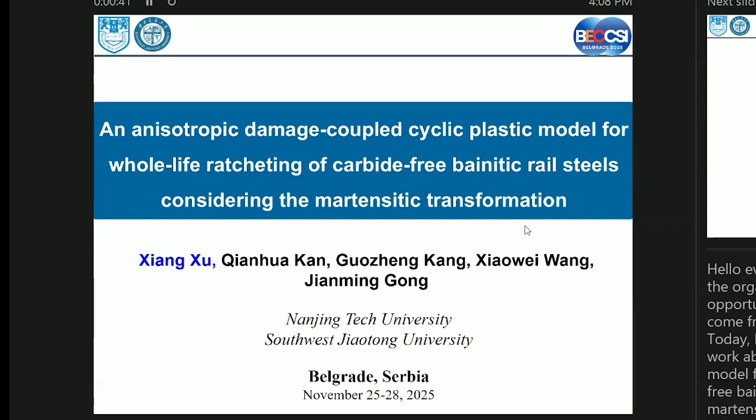Let's move on. First, I will introduce the research background and then the experimental observations. After that, more attention will be concentrated on the damage coupled model, followed by simulation results and some discussions. At the end, some conclusions will be presented.

Let's get started. First, the background of this research is on heavy haul railway transport. Heavy haul railway transport has been globally acknowledged as a leading direction for the development of freight rail systems, owing to its high capacity, efficiency, and low cost. The design axle loads of heavy haul railways continue to rise, so the rail materials need to offer significant improvement in wear and fatigue resistance.

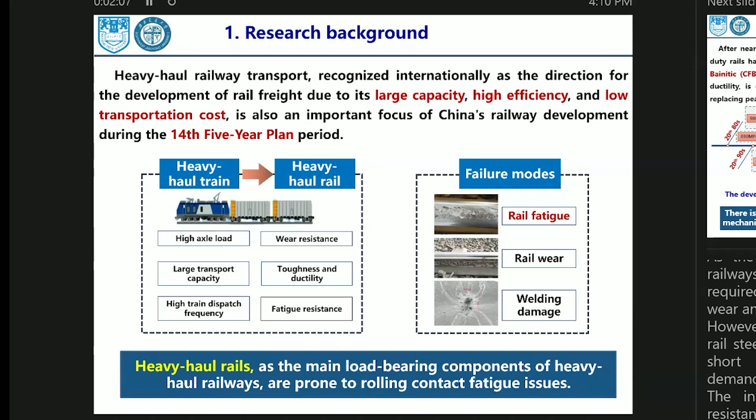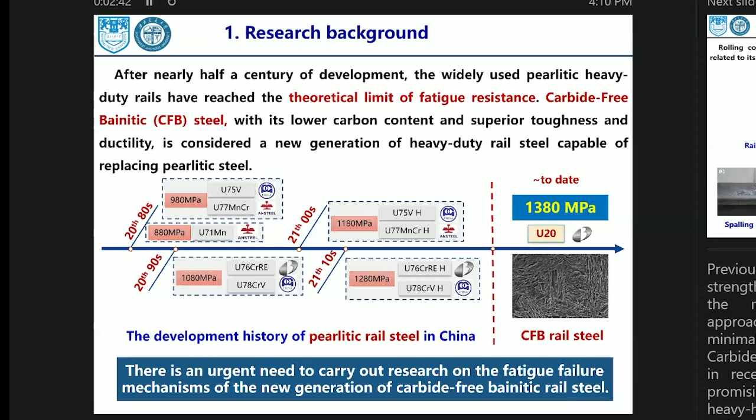However, the mechanical properties of rail steels currently in service in China fall short of meeting increasing operational demands. We need another choice since currently used pearlitic heavy haul rails have reached the theoretical limitation of fatigue resistance. Carbide-free bainitic steel, due to its low carbon content and superior toughness and ductility, is considered a new generation of heavy haul rail steel.

Actually, this material has been used in some heavy haul rail lines in China, like the Shitai line, Binsui line, and Shenshan line.

We find the main failure mode is rolling contact fatigue, and we find cracks on the gauge corners. As the cyclic loading increases, spalling will be found.

In addition, we also find the volume content of retained austenite on the surface is lower than other areas, and as the depth of the position increases, the volume of retained austenite increases. So the rolling contact fatigue is related to the microstructure, like the martensite or the retained austenite.

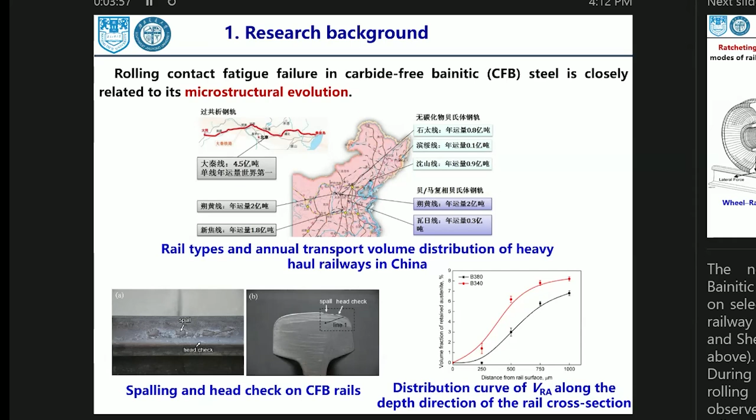In the practical wheel and rail rolling contact, the rail experiences cyclic loading with the surface subject to combined rolling and sliding under relatively high contact stress. Extensive studies have identified cyclic strength and plastic deformation as the primary contributors to rail degradation. When contact-induced stress exceeds the plastic shakedown limit of the rail surface, each cyclic loading introduces incremental plastic deformation, which accumulates over time. This phenomenon is known as ratcheting.

This finding highlights the critical role of plastic ratcheting in rail rolling contact fatigue. To mitigate the risk of catastrophic rail failures under such demanding conditions, it's important to investigate the ratcheting behavior of rail steels.

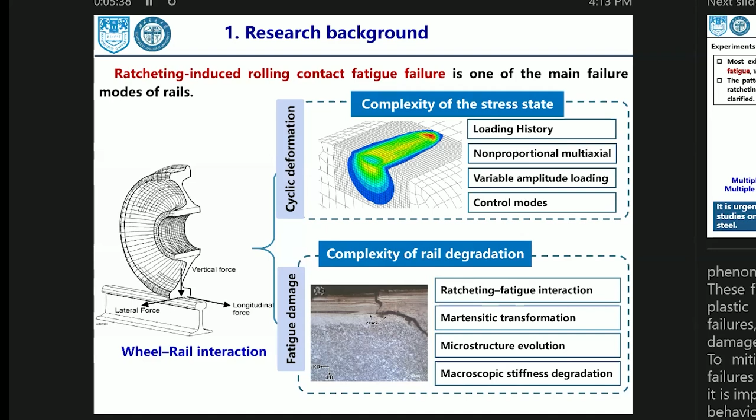For the new material, ratcheting research is lacking, and it's urgent to conduct related research. Most existing failure studies focus on monotonic tension and strain-controlled fatigue of this material, with a lack of experimental research on ratcheting deformation. The patterns of plastic deformation and martensitic phase transformation during ratcheting deformation, and their effects on fatigue damage, still need to be clarified. So it's urgently needed to conduct macro and micro scale experiments to study the mechanism of ratcheting fatigue interaction in CFB rail steels.

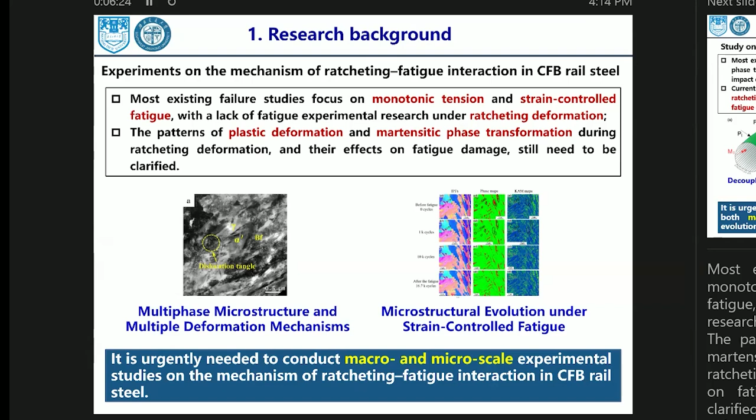For the model research, most existing constitutive models focus on describing the effect of martensitic phase transformation on strength and toughness, while models considering its impact on fatigue damage evolution are lacking. Current research mainly addresses the influence of damage evolution on ratcheting deformation, with limited attention to the effect of ratcheting on fatigue damage evolution. So we need to develop a new model that considers both martensitic phase transformation and fatigue damage evolution.

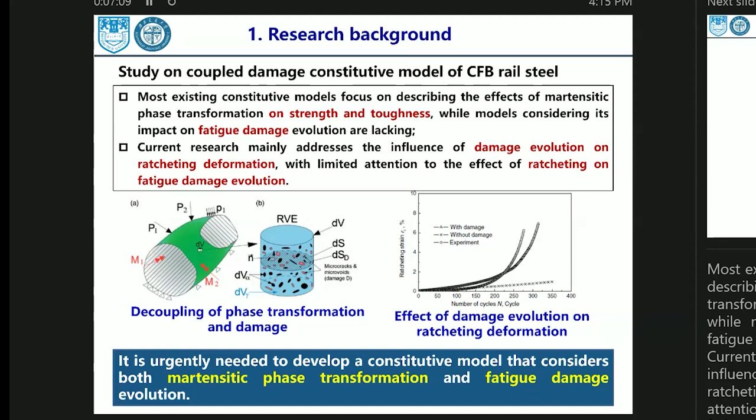Let's see some observations from the experiments.

And for the macro experiment, we used the MTS machines to do some tensile and compression, and also some multi-axial loading paths.

To investigate the evolution of the microstructure phase during the process, we conducted XRD experiments at a different number of cycles of the interrupted experiments, which can further obtain the volume fraction of the retained austenite and the dislocation density.

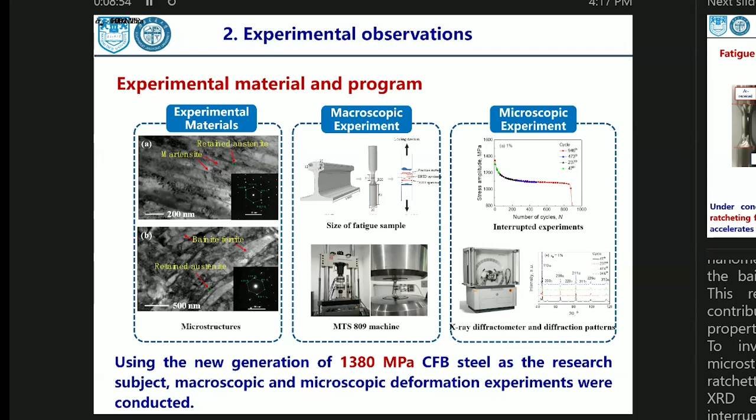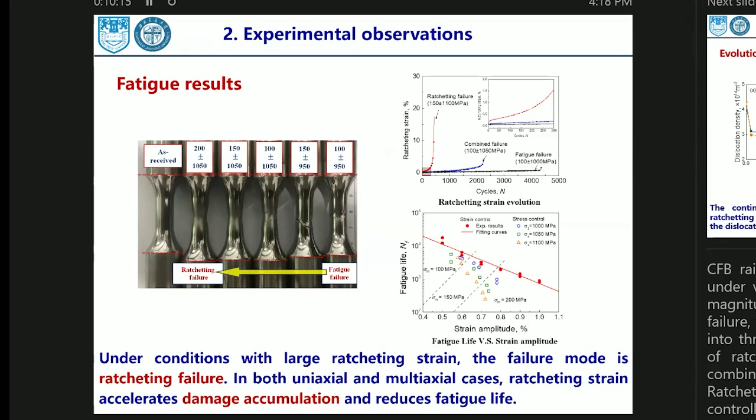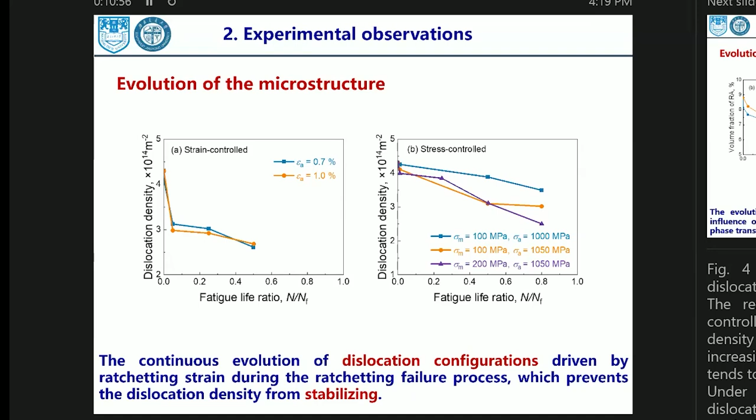And we also find microstructure evolution during the cyclic loading - this one is strain controlled and this one is stress controlled. We find the dislocation densities under the strain controlled mode decreases rapidly in the initial cycles process and reach constant values,

but under the stress controlled, the dislocation density reduces slowly and does not reach a plateau. And for the volume fraction of the retained austenite, we also find similar trends under strain controlled - the volume fraction decreases rapidly and reaches a constant value, and under stress controlled, the volume fraction of the retained austenite decreases continuously and does not reach a constant value.

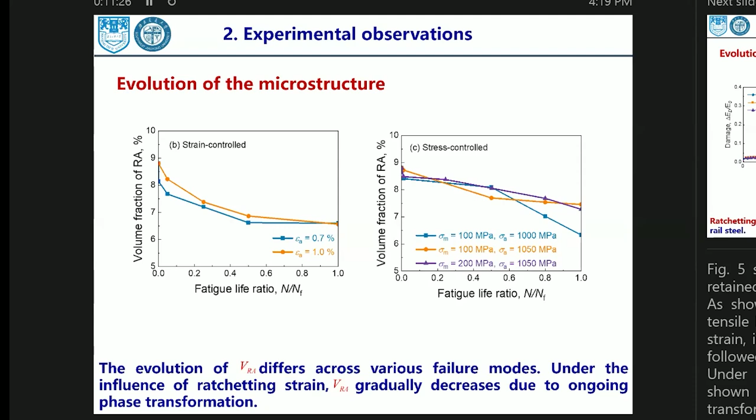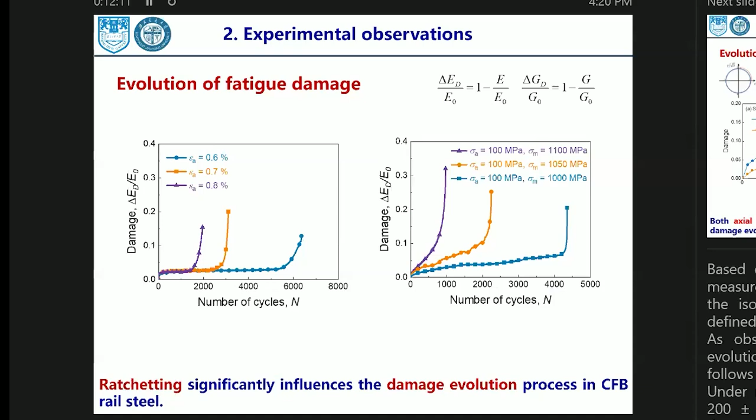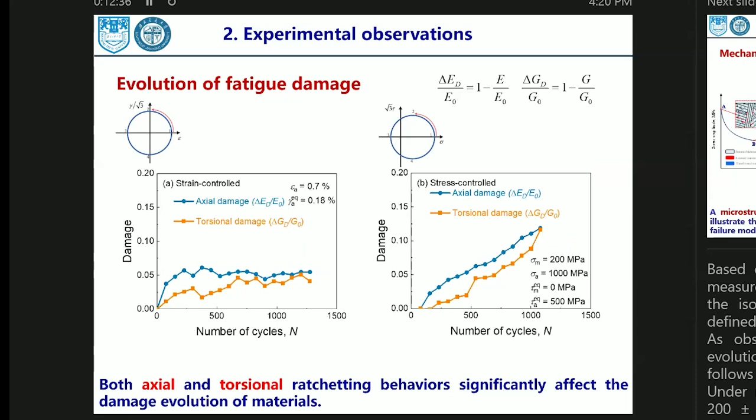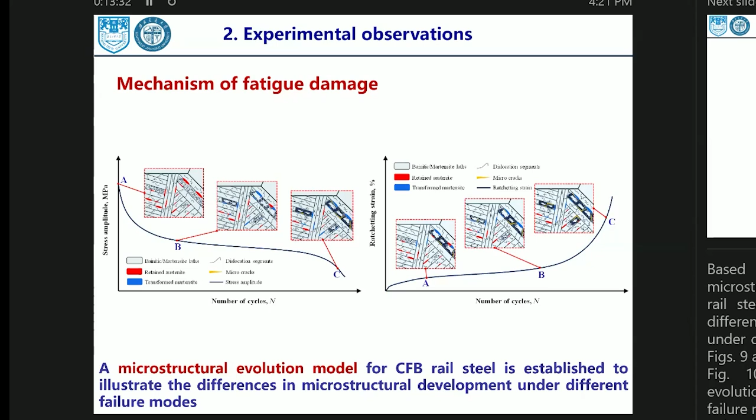Of course, this microstructure evolution model is concluded with the evidence of other experimental observations, and I don't show this in this presentation.

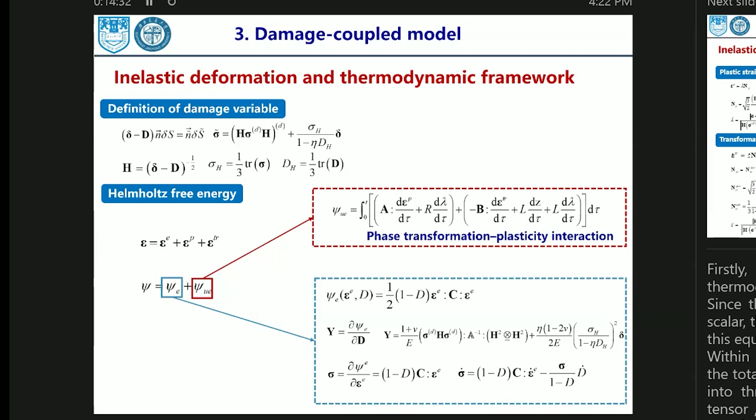And for the given state, the Helmholtz free energy can be divided into the elastic one and the inelastic one, and we derive from the stress and strain, elastic and damage relations, and most importantly, we introduce the phase transformation and the plastic interaction in this free energy.

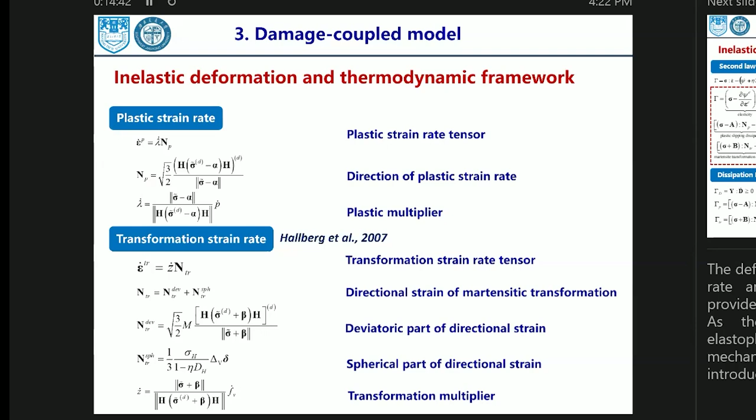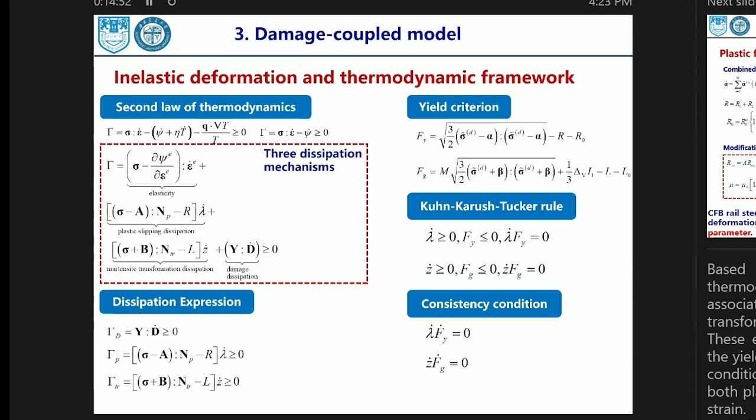And the plastic strain rate and the transformation strain rate are used here. We have two inelastic mechanisms and three dissipation mechanisms, and maybe I should go through these quickly.

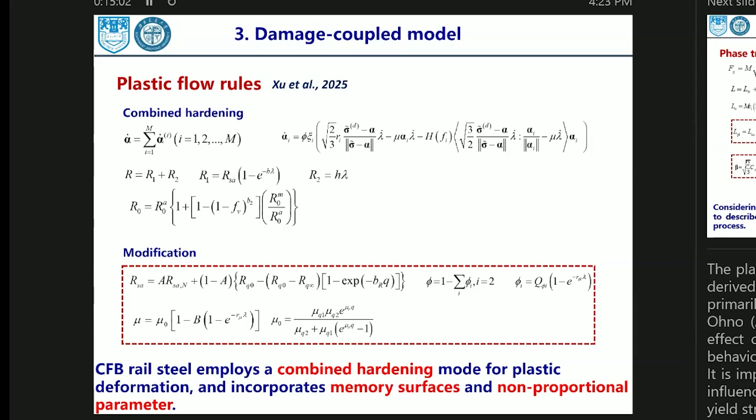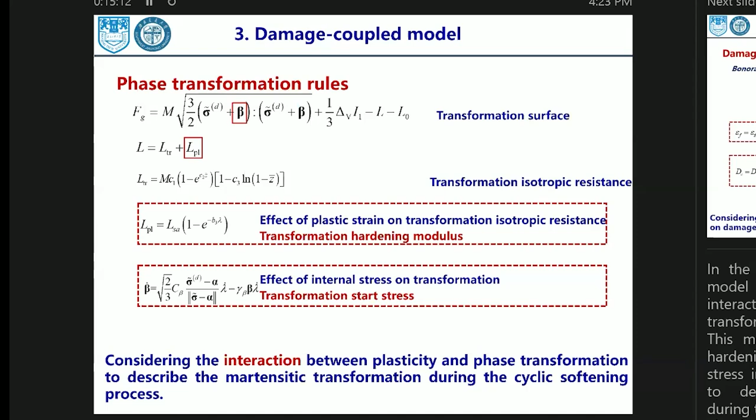And the plastic flow rules are based on our previous work for cyclically softening materials. And for the phase transformation rules, we introduce two terms to consider the transformation and the plastic interaction.

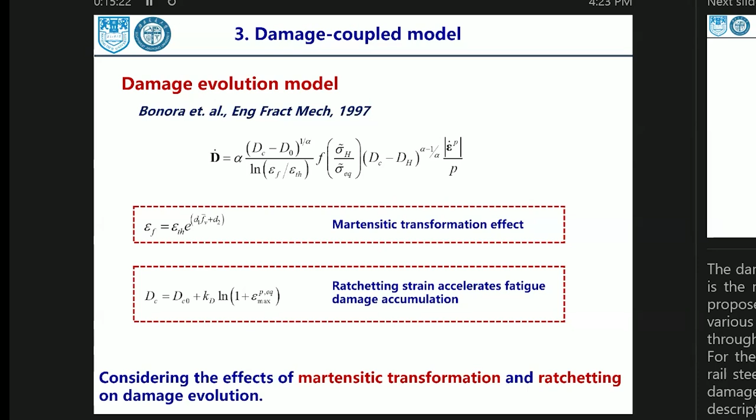And for the damage evolution, we introduce the martensitic transformation effect and the ratcheting strain effect.